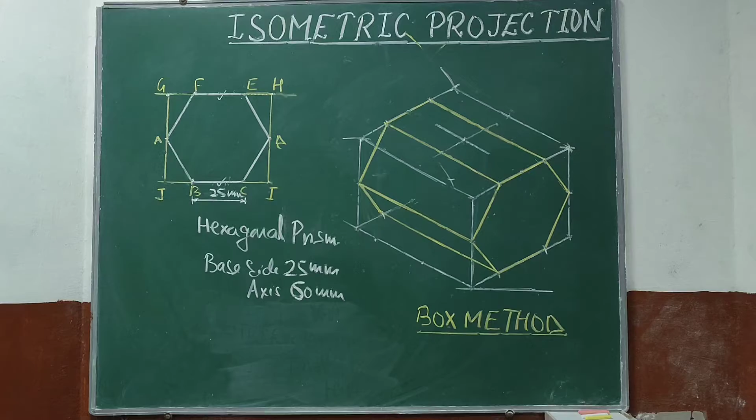Hello students, welcome again to another lecture on engineering graphics, that is on isometric projection.

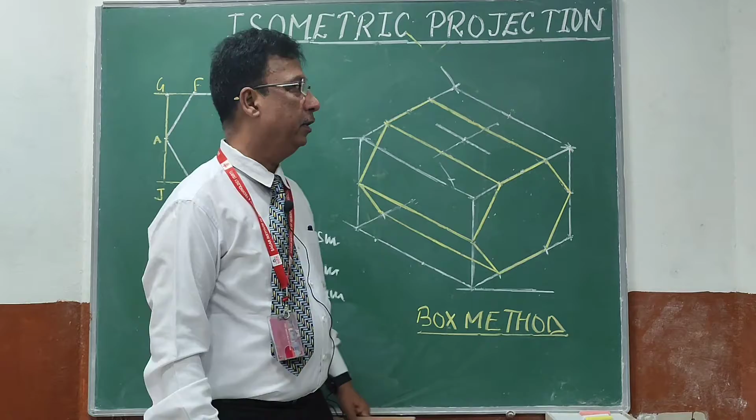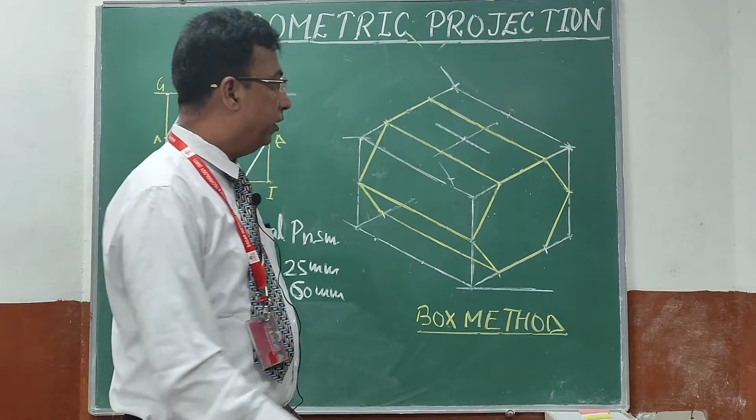If you remember, last time we solved the problem where there is a hexagonal prism, its base 25, axis 60 mm, having one of its rectangular faces on the HP with axis perpendicular to VP. Already we have drawn the isometric projection of this, and last time I told you I used the box method, in which I bounded this whole prism inside a box, and later on we drew this yellow colored part, which will be our prism.

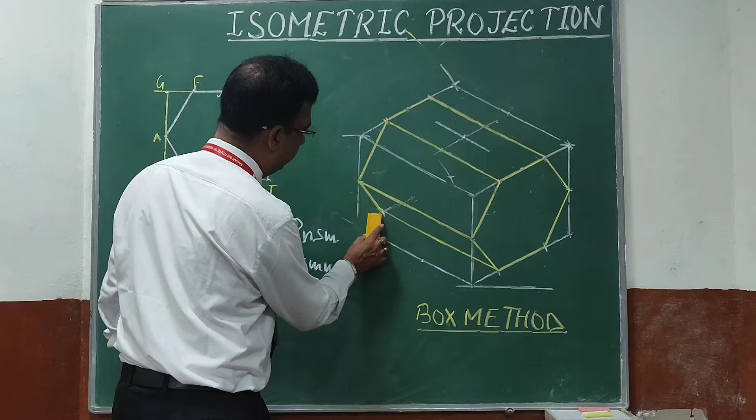As I already discussed with you, if we remove these extra parts, the figure will look even better. So if I remove all these lines, the extended box that I used to draw that solid, it will be like this. This is our

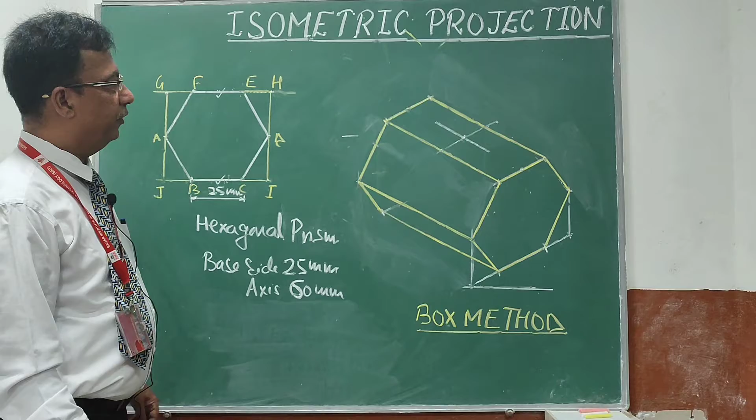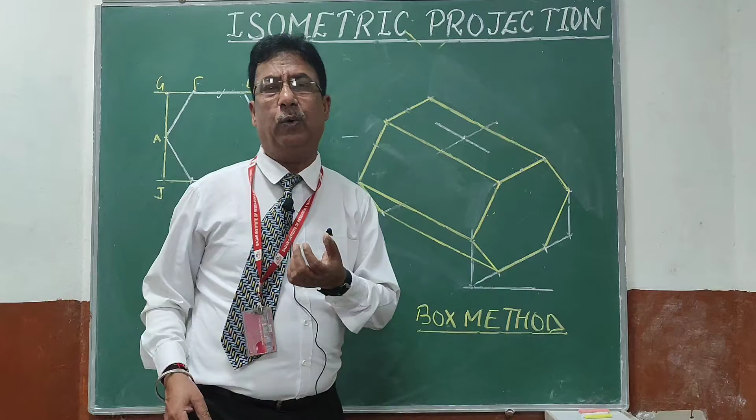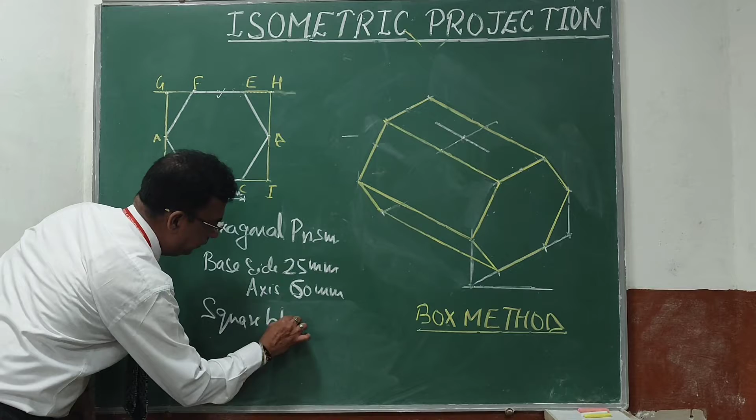prism. Now I am going to place another solid, that will be a square block. I am taking a square block of base 50 mm side and thickness 20 mm. So on this above face, I am going to place that square block.

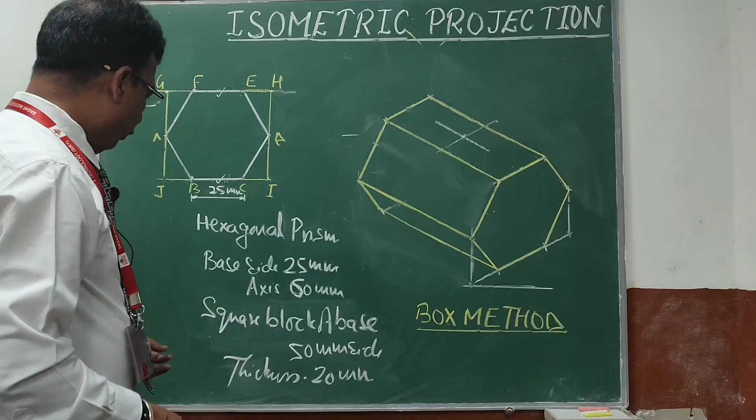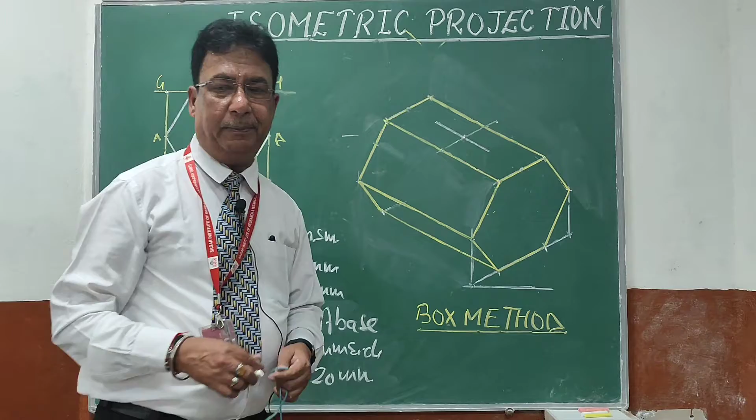If we look at the square block from the top, that square will look like a rhombus in the isometric, and the two axes used will be the 30-30 axes. Last time I used the box method. This time I am going to tell you about one more method that we use for isometric, known as the offset method. In the offset method, we mark a point, and along that point we mark our

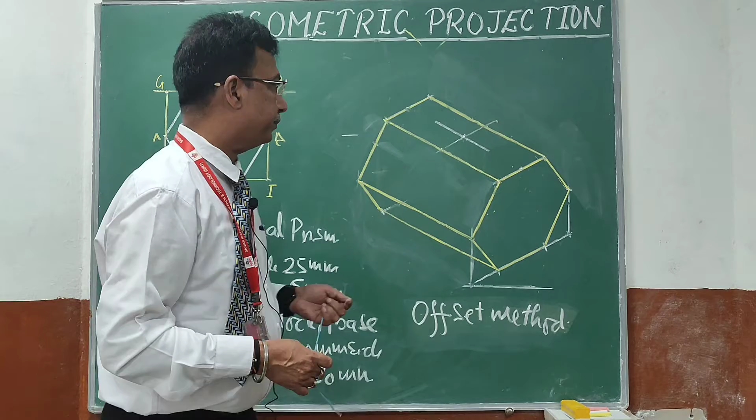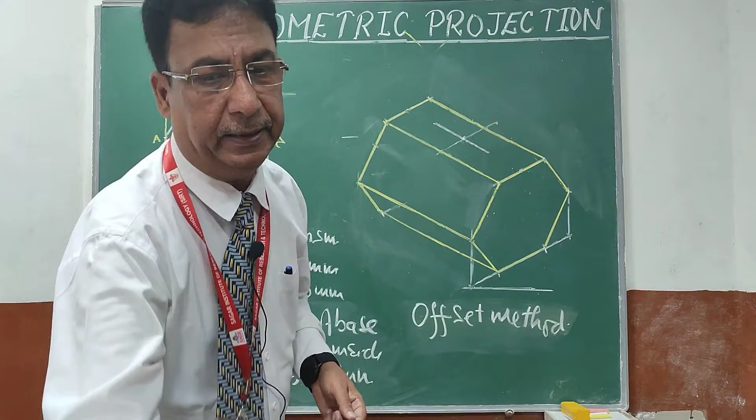figure. So right now, if I want to keep a square block on the top of this upper face, I have marked the midpoint of this upper face, and on that midpoint draw a line at 30 degrees and another line at 30 degrees. As we know, our rhombus will be on the sides 30-30, so just mark the center on which you want to place the

solid, and from here pick this 25 length. After picking this 25 length, mark 25 on this side, the opposite side, and this fourth side. On all four sides, mark 25, 25, 25 and 25, and after that from these points draw lines parallel to 30-30, from this and this one also, like this.

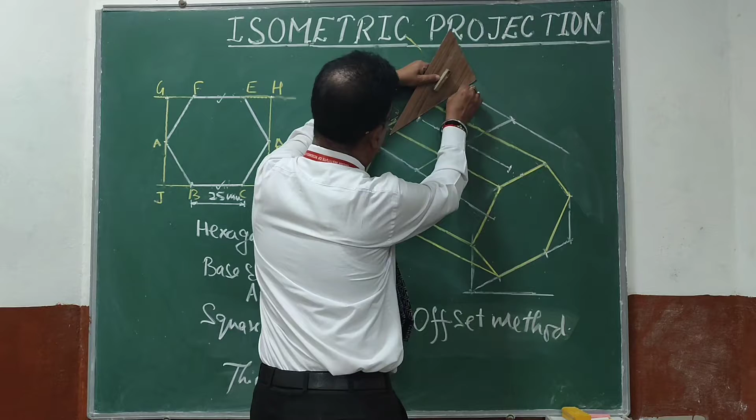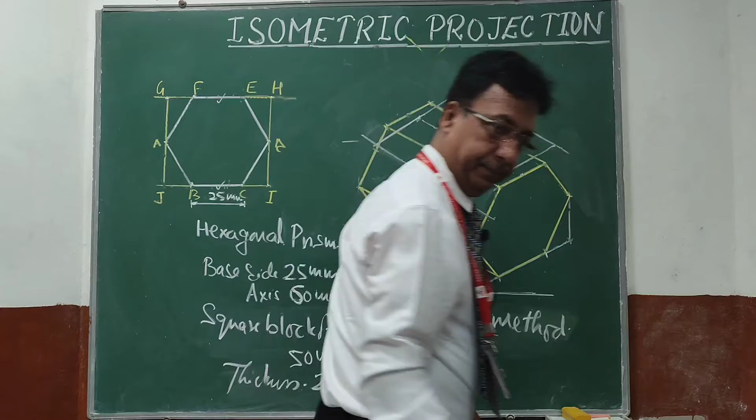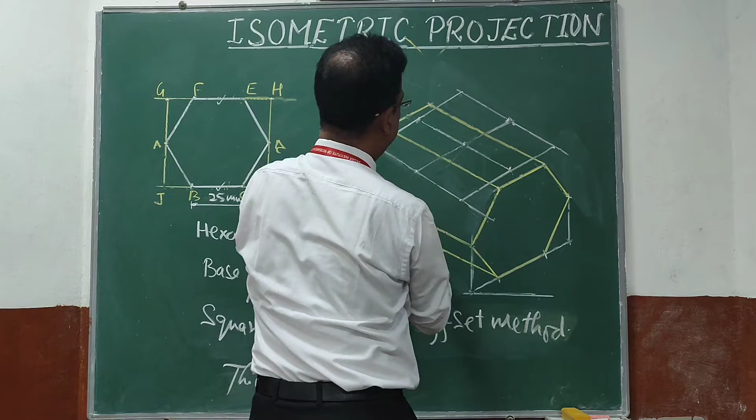Same way, parallel to this 30, from this point draw a line at 30, and parallel to this line from this point draw a line at 30 degrees. Now if I check the dimensions, this is the base of the square block that I have kept above this.

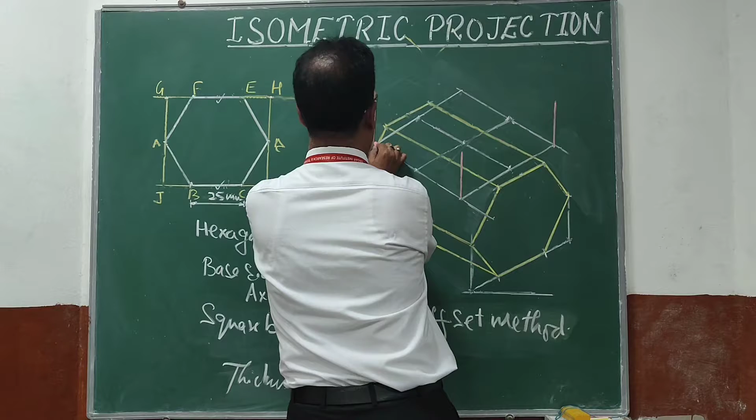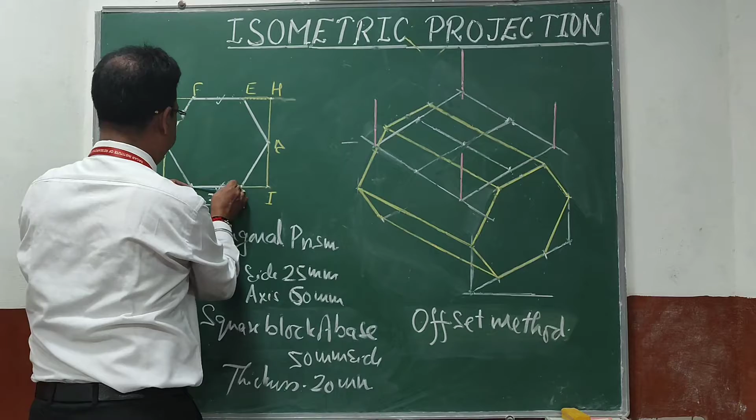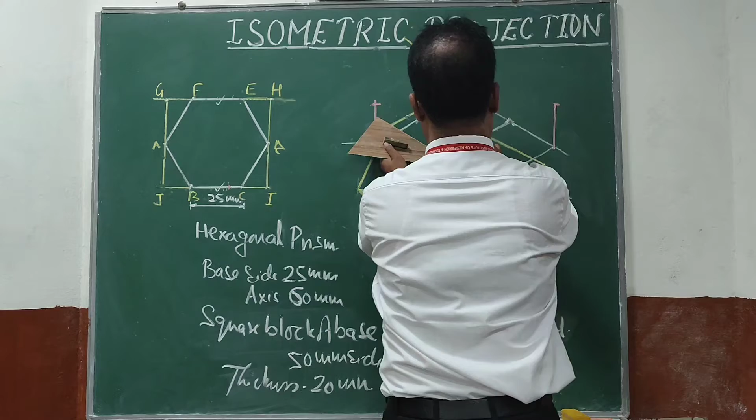Now I will give it a height of 20 mm. So I can go 20 mm upward from all 4 points, and from here we will pick the 20 mm length. Suppose this is 20 mm. So 1, 2, 3 and 4, 20 mm lengths marked by me. After that, join this.

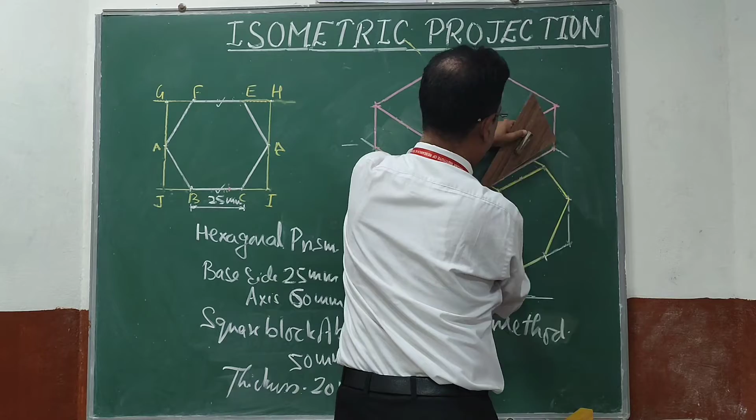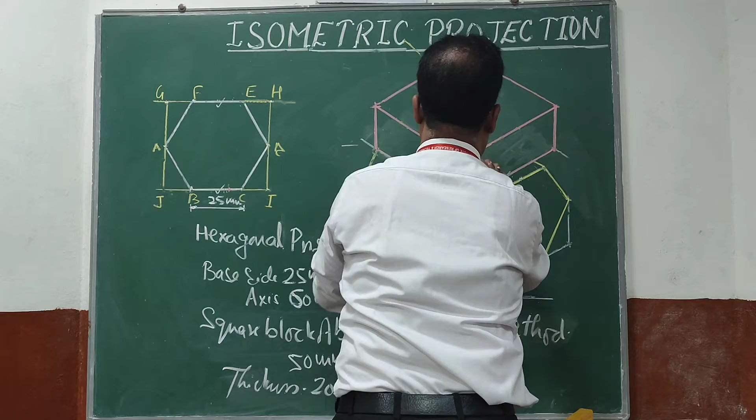Now if I rub out this inner portion, now look at this figure.

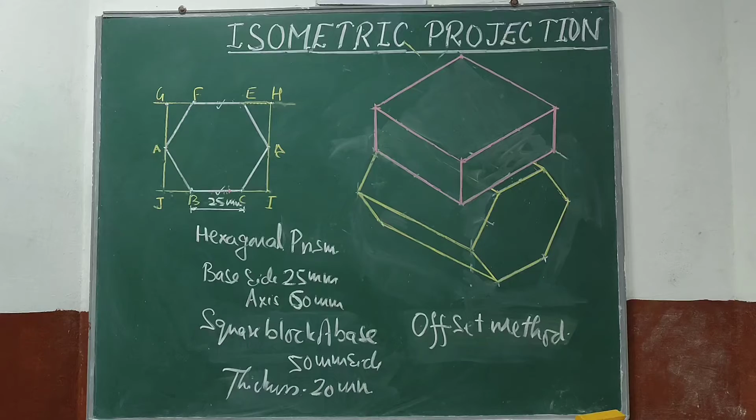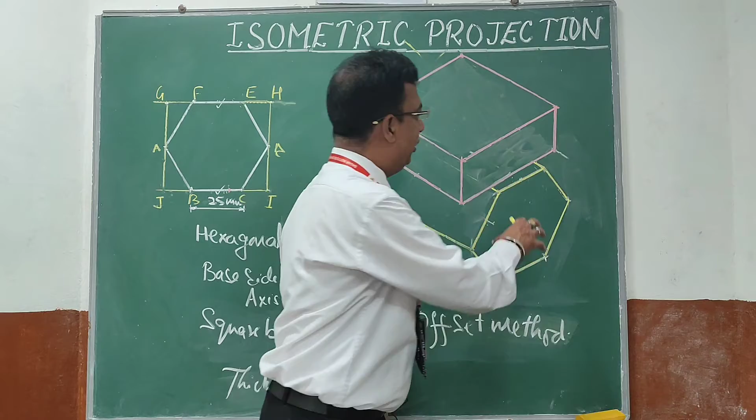So this is the combination of solids. There is a hexagonal prism with axis parallel to HP, and above it I have placed a square block centrally on the face which is parallel to the HP. So in this way you can place one solid above another solid. I hope you understand. Just finish this one.

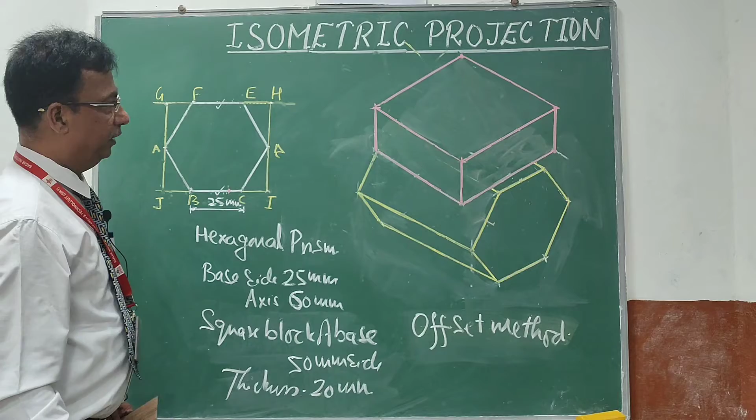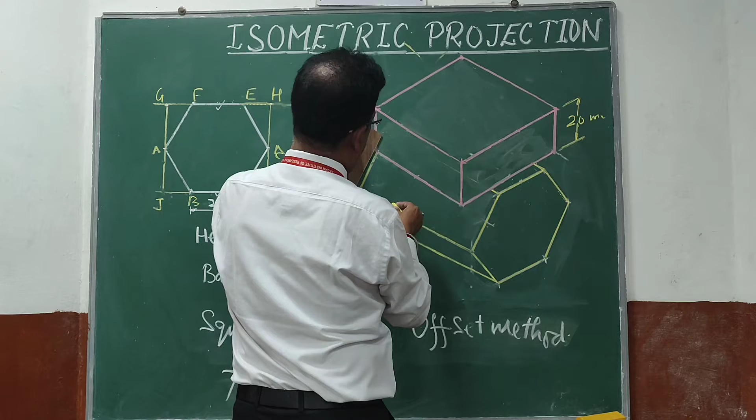If you want to dimension this, then as I told you, the dimension will be like this. We go along 30-30 and this will be 20 mm. Regarding this dimension, go along this 30-30 line.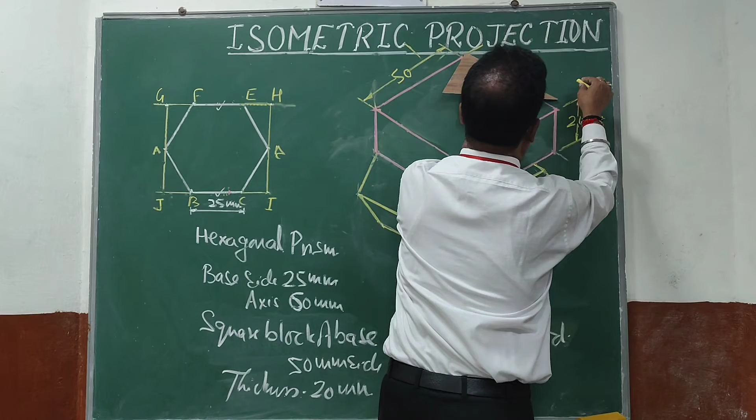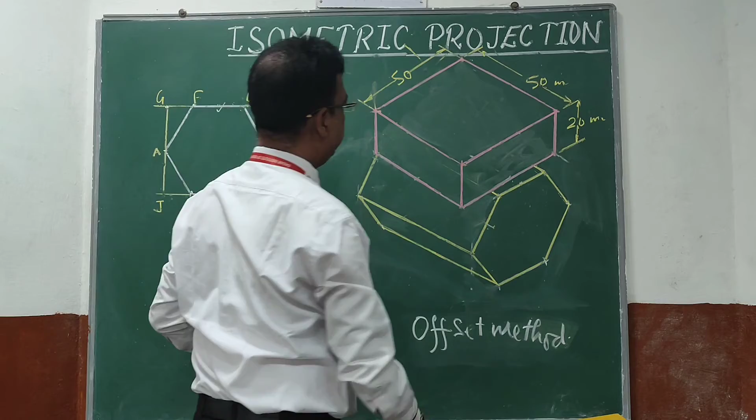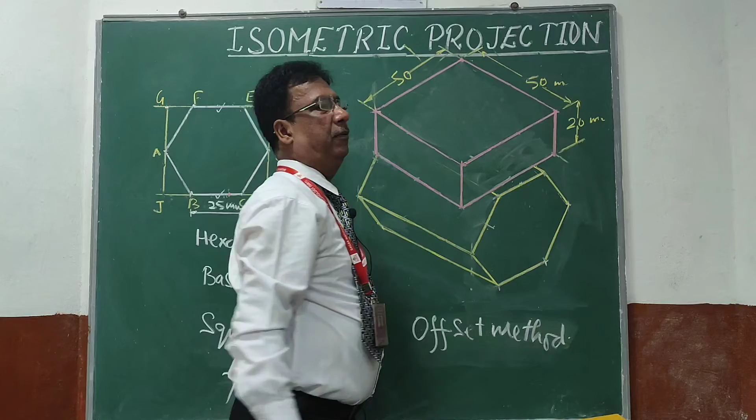Okay, so I hope that you can draw this, and it will be interesting. If you want to keep another solid, place it above this. Maybe place a cone. That is homework for you. Just place a cone above this, resting on its upper face. The base size of the cone will be 30 mm.